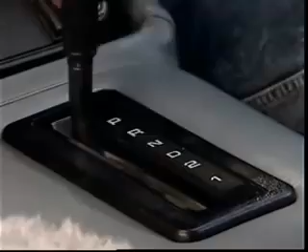Selector position 2 also permits automatic changes, but from first to second and from second to first only, depending on road speed and throttle opening. Third gear will not engage in this position.

With the vehicle cruising in third, selecting 2 will cause an immediate downshift to second. Selecting 1 in similar conditions causes an immediate downshift to second, and then, when road speed drops sufficiently, to first. Full engine braking is available in both second and first gears. This also applies when the vehicle is in reverse.

The planetary gear set is a Ravigneaux type with primary and secondary sun gears, primary and secondary planet pinions, and one ring gear. The ring gear is attached to the output shaft.

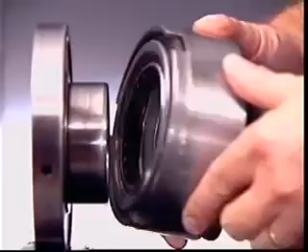The planet carrier is mounted in the transmission case on a one-way clutch. Both sets of pinions are in the planet carrier. They mesh in pairs. The longer outer secondary pinions mesh with the ring gear at their outer edge. At their inner edge, they mesh with the secondary sun gear. The smaller primary pinions mesh with the smaller primary sun gear.

The planet pinions transmit the drive from the sun gears to the ring gear. In all forward ratios, drive is transmitted through the primary sun gear. In reverse, it is transmitted through the secondary sun gear.

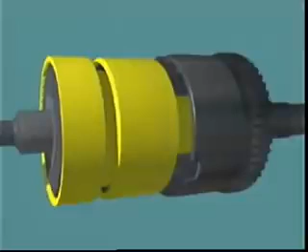Control of the planetary gear set comes from the operation of 2 multi-plate clutches, the one-way clutch, and 2 brake bands. The outer plates of the front clutch are splined to the input shaft from the converter turbine. The inner plates are splined to the primary sun gear shaft.

The inner plates of the rear clutch are splined to the front clutch drum. The outer plates connect to the secondary sun gear.

The front band wraps around the outside of the rear clutch drum. The rear band is on the outside of the planet carrier to hold the planet carrier stationary when it is applied.

When the rear band is in the release position, the one-way clutch lets the planet carrier rotate forward, but not in a reverse direction.

These are the components and control elements engaged in each gear range: the front clutch, the rear clutch, the front band, the rear band, and the one-way clutch. The front clutch combines with other elements to provide the required ratios for all forward gears.

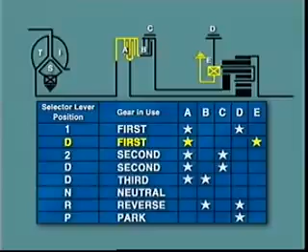When D is selected, the front clutch is engaged. The one-way clutch acts as the reaction member, holding the planet carrier stationary and stopping it rotating in the opposite direction to the input shaft.

Power flow is from the input shaft through the applied front clutch to the primary sun gear, which turns clockwise. Since the primary sun gear is meshed with the primary pinions, the pinions rotate anti-clockwise.

This turns the secondary pinions clockwise on their pins on the locked planet carrier. The secondary pinions turn the ring gear and the output shaft in a clockwise direction at a reduced ratio and with increased torque.

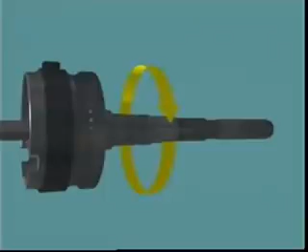The gear reduction in first gear is 2.39 to 1. The secondary sun gear rotates freely in the opposite direction to the primary sun gear.

On overrun, when torque is applied from the road wheels, the one-way clutch unlocks and allows the planet carrier to rotate. The transmission free-wheels and no engine braking is provided.

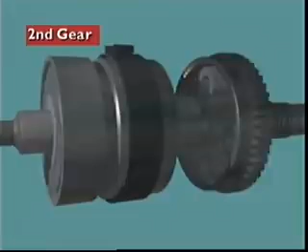In selector position D, and also in position 2, the front clutch and the front band are applied to obtain second gear. When the transmission changes from first to second, the front clutch remains engaged and the front band is applied to lock the secondary sun gear to the case.

The secondary sun gear now becomes the reaction member. Power flow is from the input shaft through the applied front clutch to the primary sun gear and to the primary pinions.

The anti-clockwise rotation of the primary pinions turns the secondary pinions clockwise. Since they mesh with the secondary sun gear and the ring gear, they walk around the stationary sun gear and rotate the ring gear in a clockwise direction.

In both drive and overrun conditions, torque reaction is taken by the applied front band, which holds in either direction. The gear reduction in second gear is 1.45 to 1.

In selector position D, the front and rear clutches are applied to obtain third gear. When the transmission changes from second to third, the front clutch remains engaged. The front band is disengaged and the rear clutch is applied. Since both clutches are now applied, the input shaft is locked to the primary sun gear through the front clutch and to the secondary sun gear through the rear clutch. With both sun gears locked together and to the input shaft, there is no relative motion between the gears. The whole gear set rotates as one unit to give a direct drive with a ratio of 1 to 1.

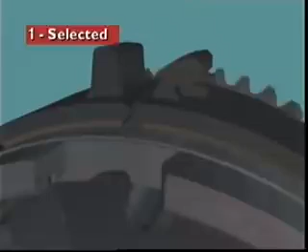In selector position 1, the front clutch and the rear band are applied. Application of the rear band locks the planet carrier to the case. Power flow through the gear set in the drive condition is the same as in selector position D, first gear. Drive is transmitted through the front clutch to the primary sun gear and through the short and long pinions to the ring gear at the ratio of 2.39 to 1. However, on overrun, the locked planet carrier acts as a reaction member, so full engine braking is provided.

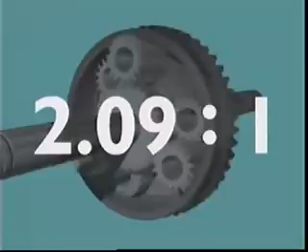In reverse, the rear clutch and the rear band are applied. The rear clutch locks the input shaft to the secondary sun gear. The rear band locks the planet carrier to the case to provide the reaction member. The input shaft turns the secondary sun gear clockwise. The secondary pinions turn anti-clockwise on their pins on the locked planet carrier. The ring gear and output shaft turn in the reverse direction with a ratio of 2.09 to 1. Full engine braking is provided on overrun.

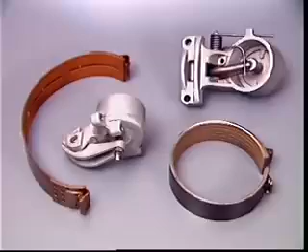Servos in automatic transmissions convert hydraulic pressure acting on a piston into a mechanical force. In this transmission, a front and a rear brake band are used. A servo is required for each.

The rear servo is a pressure apply spring release type. Its piston has a central stem which locates in one end of the rocker arm to transfer the apply force to the band. A lever-type spiral spring returns the servo and band to the off position when the fluid is dumped. The rear band holds the planet carrier stationary when it is engaged. It is applied in drive ranges with low ratios.

The high apply force required is provided by a combination of the large diameter piston and the leverage provided by the rocker arm. Fluid at line pressure is converted to an apply force by the piston, and this acts on the longer end of the rocker arm. The apply force is multiplied to about 5 times its value, then applied to the free end of the band. The band contracts and wraps itself firmly around the planet carrier drum to lock the planet carrier to the casing.

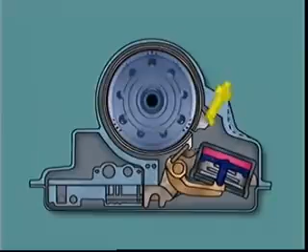An adjusting screw threaded in the casing provides the anchorage point, so the band can be easily adjusted when necessary to compensate for wear.

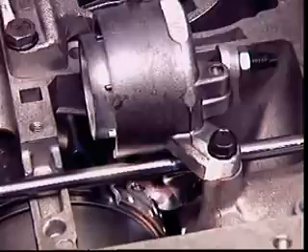The front servo is a pressure apply, pressure release type with unequal piston areas. It is engaged with the front clutch to provide second gear and acts on a lined spring steel band to lock the secondary sun gear to the casing.

The apply force from the piston is transferred through its central stem and multiplied by the rocker arm with its leverage ratio approximately 3:1. This applies the band firmly when second gear is engaged. The apply fluid acts on the smaller piston area surrounding the hollow portion, which accommodates the return spring.

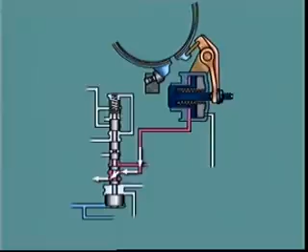If road speed is reduced, the 1-2 shift valve will move to the first gear position. This apply fluid will be exhausted at the 1-2 shift valve, letting the spring return the band to the off position.

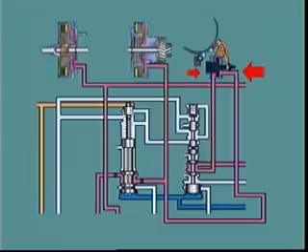If road speed increases, the transmission will eventually upshift to third gear. This requires the rear clutch to engage, together with the already engaged front clutch. The front band must be released, but the apply fluid is not exhausted to provide this change. The apply fluid is retained. Then, when the 2-3 shift valve moves to supply fluid to the rear clutch, the same fluid is supplied to the release side of the front servo. Equal line pressures act on each side of the front servo piston, so the larger area on the release side generates greater force. This moves the piston to the released position.

If the accelerator is depressed for kickdown, or road speed drops off, retaining the apply fluid can provide a snap band application to re-engage second gear.

Clutches in automatic transmissions control gear train members. This transmission has 3 clutches. A one-way or overrunning clutch is between the planet carrier and the center support. A multi-plate clutch is inside the drum attached to the input shaft, the front clutch. A multi-plate clutch is inside the drum attached to the secondary sun gear, the rear clutch.

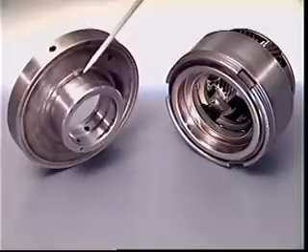The one-way clutch is a sprag type. It locks the planet carrier to the center support whenever the carrier tends to turn in the opposite direction to the transmission input shaft. The inner race of the clutch is provided by an extension on the center support. The outer race is formed in the planet carrier.

The equally spaced sprags are held together by a spring-loaded cage. It maintains them in the correct position and attitude. Correct fitting is essential, otherwise the planet carrier will freewheel when it should be locked up, and no drive will be transmitted in D-range first gear.

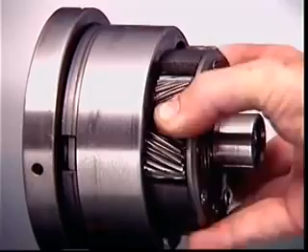With the sprags in place, the cage moves them so that they share the load equally when the planet carrier is locked. Turning the planet carrier in the opposite direction to the input shaft pivots the sprags towards the larger radius and wedges them between the 2 races.

The front clutch is a multi-plate type, engaged in all forward ratios. The clutch operating piston moves in a short cylinder in the clutch drum. A diaphragm-type spring contacts a fulcrum ring on the piston at its inner circumference. Its outer edge rests against a step in the drum.

A pressure plate is installed first in the clutch pack so that its fulcrum ring also contacts the diaphragm. When fluid at line pressure is admitted to the clutch cylinder, the piston apply force is multiplied by the leverage provided by the diaphragm. This exerts a greater apply force on the clutch pack than the piston alone could provide, and ensures the clutch is firmly engaged. The spring returns the piston to the off position when the fluid is dumped.

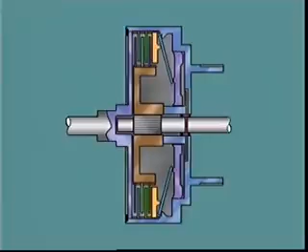Two sets of plates make up the clutch pack: the driving plates and driven plates. The outer driving plates are flat. External splines locate in mating splines in the clutch drum.

The inner driven plates have friction material bonded to them. Their splines mate with splines on the outside of a central hub, which is itself splined to the primary sun gear. The friction material can be treated fibre or reinforced paper. It may have a grooved surface to assist in wiping oil from between the plates when the clutch engages.

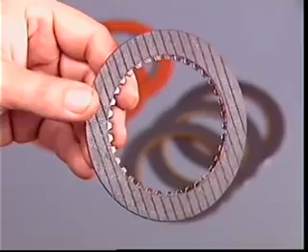The plates are loaded into the clutch drum against the pressure plate and are placed alternately to make up the pack. The central hub is installed to engage the inner plates and the thrust washer placed in position. The large face of the input shaft acts as the final plate in the pack. The splines at its outer edge transmit the input torque to the clutch drum and the driving plates.

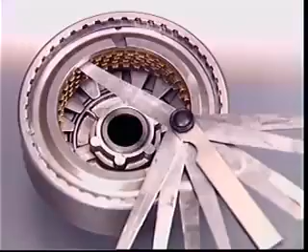The input shaft is retained in the drum by a large diameter snap ring. The number of plates installed determines the torque capacity of the clutch. Installing more plates increases torque capacity, but the clutch must always maintain its set clearance so the plates can separate from one another while in the released position.

A centrifugal relief valve in the clutch piston releases fluid trapped in the cylinder when the clutch is released. This prevents partial application of the clutch due to centrifugal force acting on the fluid at high speed.

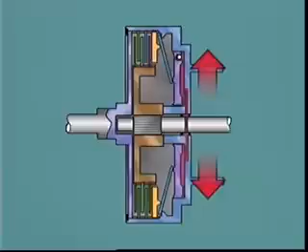The rear clutch is similar in construction to the front clutch, but with a larger diameter piston and a coil-type return spring. This spring is compressed against the face of the clutch piston when fitted. The outer plates in this clutch are the driven plates and are splined to engage with the splines in the clutch drum as before.

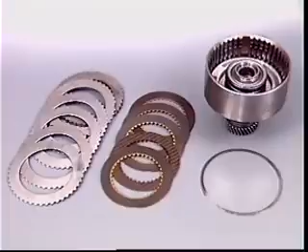These plates may have a flat surface or a slightly dished or coned surface. The dished plates provide a cushioning effect, which assists with smooth engagement when the clutch is applied. The plates may be fitted as a pack, with the dishing in either direction, but all of the dishing must face the same way, or clearance may be compromised.

The inner plates are splined to mate with splines on an extension on the front clutch drum. They transmit the drive from the input shaft to the outer plates when the clutch is engaged. The clutch plates are assembled in the pack alternately, with the steel plate placed first against the clutch piston. The pressure plate is assembled last, and the pack is retained in the drum by a snap ring.

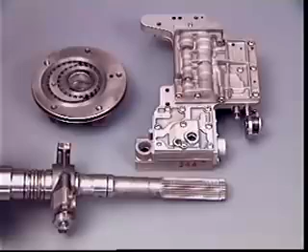The hydraulic system has a crescent-type gear pump, a centrifugally operated hydraulic governor, and a control valve body assembly to regulate the pressure and direct fluid to the appropriate components.

The pump is driven by tangs on the converter spout and operates whenever the engine is running. It supplies all the hydraulic requirements of the transmission during operation.

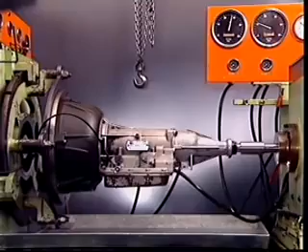The governor is driven by the transmission output shaft and provides a hydraulic pressure that varies with vehicle speed. This variable pressure is used by the valve body as one of the inputs to control upshifts and downshifts.

The valve body has all the valves needed to control the transmission at all stages of operation. They are mostly spool-type valves, but disc and ball check valves are also used.

Cylindrical spool valves have a number of distinguishing features. The lands are the raised portions of the valve, while the reduced diameter between each pair of lands is referred to as a valley. The face of each land is square and sharp to the land diameter.

Some valves have a stem or extension on one end to locate a regulating or return spring, or to limit valve travel.

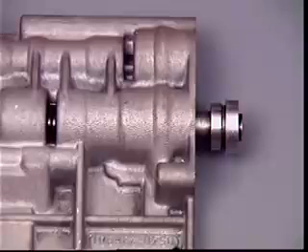Sharp corners on lands keep out dirt particles and give the valve a self-cleaning action as it moves back and forth in the bore.

There is only small clearance between lands and the bore for each valve, so they must be handled with care.

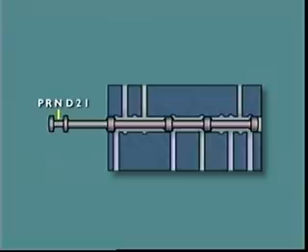Spool valves can be positioned manually, or by springs, or by pressure, and in many applications have lands of different diameters. In this case, the different diameters result in a larger face area on land 1 than on land 2. This is known as a differential area.

When fluid under pressure enters port B, this differential area creates a differential force. This moves the valve to the left, since the force acting on land 1 is greater than the force on land 2.

Alternatively, the valve could be moved by admitting fluid at port C. In both cases, the valve movement allows previously blocked fluid at D to flow between lands 3 and 4. It exhausts at E or passes to some other part of the system.

If fluid pressure is removed from C, the valve remains stationary. Even if fluid is admitted at port A, no movement can occur, as the areas on lands 2 and 3 are equal and both generate an equal force.

The valve can only be moved back to its original position by introducing spring pressure or fluid pressure on the left-hand side of land 1.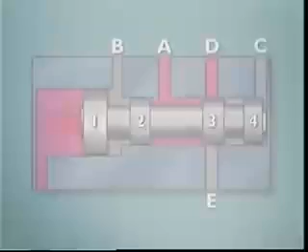The valves can be divided into two groups: pressure regulating valves, and those that direct flow and pressure, or flow control valves.

Spool-type valves are suitable for pressure regulation in automatic transmissions, as variable pressures are needed.

In this regulating valve, the valve spring is compressed when pump or supply pressure is high enough. The larger land then uncovers an exhaust port to maintain a regulated output pressure.

Similarly, with this regulating valve in a fluid circuit, the valve is forced downwards against its spring until it uncovers a port to another part of the circuit.

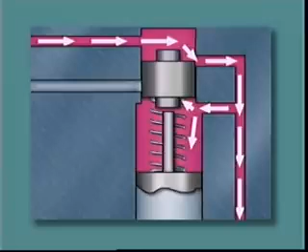Since the port is not fully uncovered, flow is restricted, which causes a pressure drop across it. Fluid pressure in this part of the circuit falls below that of the fluid being supplied. Once the port is fully uncovered, pressures on both sides of the valve become equal.

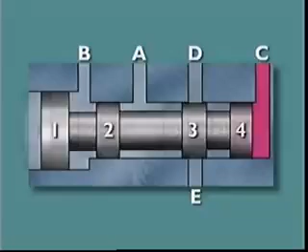Control valves are simple gate-type valves, which open or close off a circuit without altering pressure. The manual valve connected to the gear lever is a control valve, which directs fluid to components when a drive range is selected.

Control valves can also react to changes in pressure. This shift valve is held at the end of its bore by spring tension. It blocks the fluid under pressure at port A. The larger differential area at port C is subject to governor pressure.

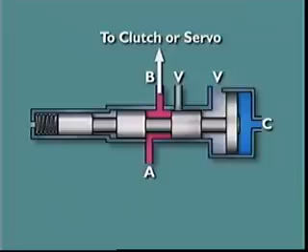As road speed rises, the rising pressure forces the valve to the left, and fluid flows across from port A to port B. This can be directed to operate the next clutch or servo and change the transmission to a higher ratio. As road speed falls and governor pressure diminishes, the spring moves the valve back to cut off the fluid supply, and the transmission downshifts.

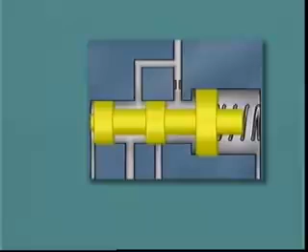Orifices are often used in conjunction with spool valves to restrict fluid flow for timing purposes or to prevent valve fluctuations. The orifice is designed to prevent sudden or undue movement of a valve.

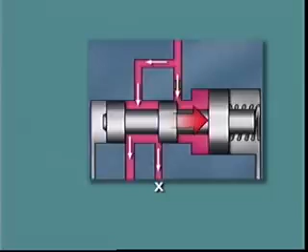In this basic primary regulator valve, the orifice is in the circuit leading to the large differential spool area. The buildup of line pressure from the pump acts via the orifice to move the valve against the spring force. This uncovers the exhaust port to release excess fluid and allows fluid at a controlled line pressure to pass to the rest of the hydraulic system.

The pressure is determined by the tension of the spring. However, pressure fluctuations are reduced because the orifice prevents the valve from reacting quickly and thus stabilizes the regulated pressure.

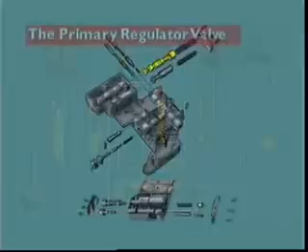This valve controls fluid pump output to maintain the required line pressure in the system. Line pressure is the highest pressure in the transmission, and all other pressures are derived from it.

This valve reduces line pressure to a low value for use in the torque converter and in the cooler and lubrication circuits.

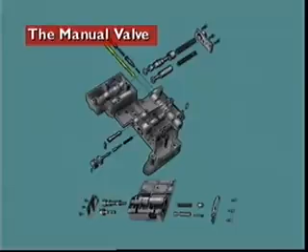This valve is positioned manually by the driver operating the selector lever. It's a control valve which directs line pressure in and out of circuits when each range is selected.

This valve shares a common bore with the downshift or kickdown valve. Both are influenced by the downshift cam, connected by a Bowden cable to the accelerator linkage.

The throttle valve re-regulates line pressure to a value which is proportional to throttle opening. The resultant throttle valve, or TV pressure, varies from zero at closed throttle to line pressure at full throttle.

This pressure is supplied to the spring end of the shift valves to delay upshifts relative to throttle opening. The wider the throttle opening, the greater the TV pressure and the higher the road speed will be before an upshift will occur.

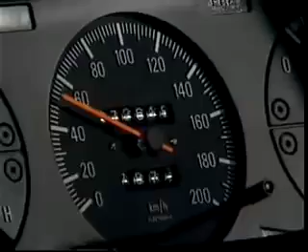TV pressure is also directed to the spring end of the primary regulating valve. As the accelerator is depressed, it progressively raises line pressure.

This ensures the engaged servos or clutches are securely applied when high torque is being transmitted and allows the pump to operate at lower pressures at other times. This reduces pumping losses and lowers fuel consumption.

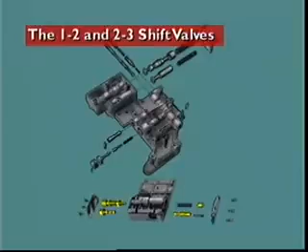The 1-2 and 2-3 shift valves are control valves, which are supplied with line pressure from the manual valve. They either block fluid or allow it to flow at prevailing line pressure to a clutch or band.

Their operation is determined by a spring plus TV pressure at one end. This acts in opposition to governor pressure at the other end.

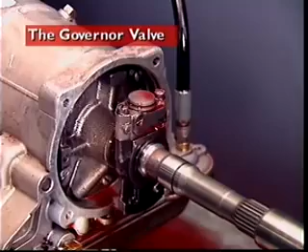This valve is mounted on the transmission output shaft and rotates with it. It re-regulates line pressure supplied from the manual valve in relation to vehicle speed.

When vehicle speed is low, governor pressure is low. When vehicle speed is high, governor pressure is high. Governor pressure is directed to the end of the shift valve to oppose TV and spring pressure. This produces upshifts relative to vehicle speed.

This valve is included in the throttle valve combination. When the accelerator is depressed fully, the downshift valve supplies line pressure onto the spring end of the shift valve.

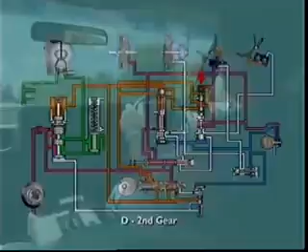If road speed is below a certain value, this forces the shift valve to move and initiate a downshift to a lower gear.

This valve is in the circuit to the release side of the front band servo. It is a timing device. When a 2-3 upshift is made at higher road speeds, it correlates front band release and rear clutch application.

Conversely, it correlates rear clutch release and front band reapplication when a 3-2 downshift is made under similar conditions.

This valve makes line pressure and throttle pressure sensitive to road speed. At higher speeds, it cuts back these pressures to allow smooth upshifts.

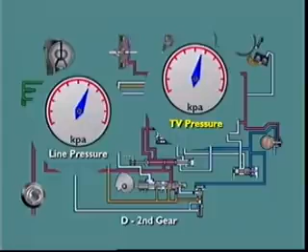It also moderates line pressure increases produced by wide throttle openings during stall or upshift conditions. High throttle pressures produced at these times raise line pressure very high.

This is because the throttle pressure is applied to the spring end of the primary regulating valve. Modulator pressure is applied to the opposite end of the regulating valve to counteract this and moderate its influence.

This is a summary of the basic action of the valves in the hydraulic system. The primary regulating valve maintains line pressure in the system. Line pressure is directed to the manual valve and to the throttle valve at all times.

The secondary regulating valve determines the pressure in the converter and in the lubricating circuits. The manual valve directs line pressure to the shift valves and to the governor valve. The shift valves direct line pressure to the band and clutch servos.

Governor pressure is directed to one end of the shift valves, while throttle valve pressure is directed to the other end. Throttle pressure is also directed to the spring end of the primary regulating valve to boost line pressure as required.

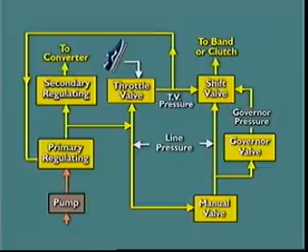The valves act together in the system, but their operation can be considered separately. The primary regulating valve has a number of lands, including one larger land which provides a differential area. A central stem locates the regulating spring.

Fluid from the pump can act on the valve through a 1 mm diameter orifice in the circuit. With the valve at rest, the two central lands block the flow of fluid across their valleys. The spring end of the valve is subject to throttle pressure through a circuit connection from the throttle valve. The lower end is subject to modulator pressure acting on the lower face of the bottom land. A vent between the two uppermost lands prevents hydraulic lockups due to fluid seeping into the valley between them.

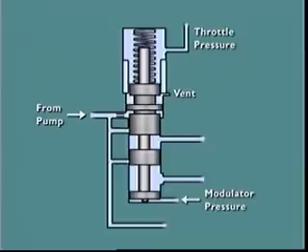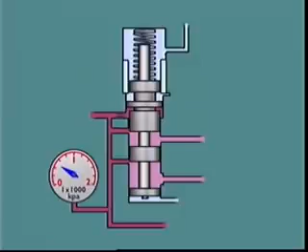In operation, fluid from the pump enters the valve through the orifice and acts against the differential area. As pressure rises, the valve moves upwards against its spring. Excess fluid can then pass across the two large valleys to the ports in line with them. The result is an initial regulation of line pressure at idling speed. This line pressure is directed to the manual valve and the throttle valve at all times.

When D is selected, line pressure is also directed to the front clutch, to the 1-2 shift valve, and to the governor. Excess fluid passing across the valleys is directed to the secondary regulating valve and the converter.

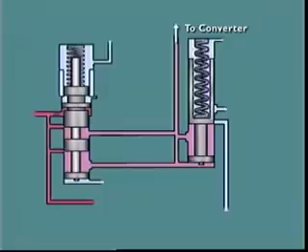Fluid from the lower port of the primary regulator valve acts on the end face of the secondary regulating valve. This raises it against its spring. Valve movement uncovers a port to the lubrication circuit for the rear end of the gear train, and then an exhaust port leading back to the pump inlet. The exhaust bleed-off stabilizes fluid pressure in the lubrication and converter circuits within acceptable limits, from 100 to 200 kilopascals.

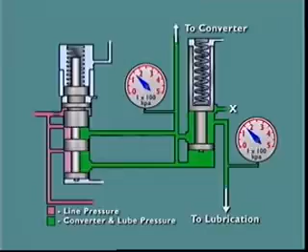Line pressure needs to vary in step with accelerator position and vehicle speed. That requires extra control over the primary regulating valve. High line pressure will hold a band or apply a clutch securely to prevent slippage when the accelerator is depressed and high torque is transmitted. Once the vehicle is moving and the transmission is upshifting, less torque is transmitted, so lower line pressure is adequate.

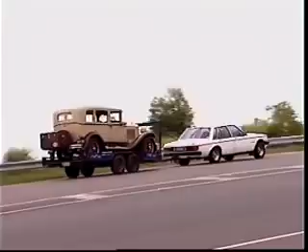Applying throttle pressure to the spring end of the primary regulating valve lifts line pressure. Applying modulator pressure to the opposite end reduces it.

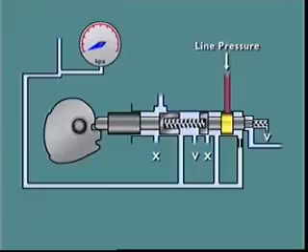Line pressure is supplied to the throttle valve at all times, and throttle pressure is derived from it. At closed throttle, the throttle valve is at rest and line pressure is blocked off by a land. Throttle pressure is zero. Depressing the accelerator transfers movement through the kickdown valve and spring. This opens the throttle valve and the land uncovers the line pressure port. Fluid at line pressure is now metered into the throttle valve circuits and a TV pressure is quickly established.

It extends through the orifice to the valve reaction area. This tends to close the valve against the spring force, minimizing pressure fluctuations. A balance is established to produce a TV pressure relative to the accelerator position. TV pressure can vary from 0 to around 1200 kilopascals.

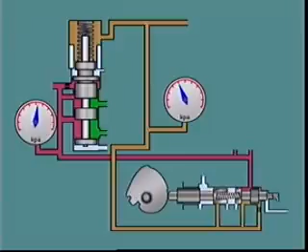TV pressure is directed back through the circuits to the spring end of the primary regulator valve. It helps the spring oppose the force of fluid acting on the valve's differential area via the orifice. TV pressure holds the primary regulator valve down to increase line pressure according to throttle opening. This ensures clutch and band apply forces are maintained in step with throttle position.

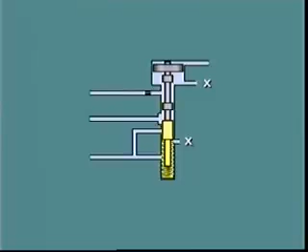Once a vehicle is moving, the primary regulator valve needs to reduce line pressure to assist smooth gear shifting and fuel economy. Modulator valve pressure is directed to the end of the valve opposite to the regulating spring. The modulator valve assembly is in two sections: a modulator valve and a modulator plug and spring.

The modulator valve operates by throttle pressure, but is also subject to governor pressure, so its output responds to accelerator position and vehicle speed. Throttle pressure directed to the modulator valve moves the valve up and forces the plug down against the compression of the spring.

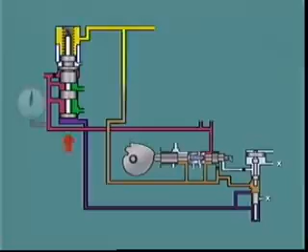Separating the valve from the plug re-regulates the throttle pressure to modulator pressure. It is then directed to the end of the primary regulator valve opposite the spring. If the accelerator is fully depressed, high modulator pressure forces the primary regulator valve upward to oppose throttle pressure and spring pressure. This prevents excessive line pressure under stall conditions.

Rising vehicle speed develops governor pressure, which is directed onto the large land area at the end of the modulator valve. When governor pressure overcomes throttle pressure, it forces the modulator valve down. That forces the modulator plug to bottom out. The modulator plug can then no longer reduce the incoming throttle pressure.

Undiminished throttle pressure will now exist in the modulator circuit. The regulator valve is forced up, reducing line pressure for a smooth upshift. This reduction in line pressure is called the cutback point.

Moving the modulator valve down allows throttle pressure to pass between the modulator valve lands. This passes into a circuit, returning to the smallest reaction area at the end of the throttle valve. This pressure acting through the orifice in the circuit helps move the throttle valve to the left against its regulating spring. This reduces the initial throttle valve pressure established in the throttle pressure circuit, and in turn further reduces line pressure.

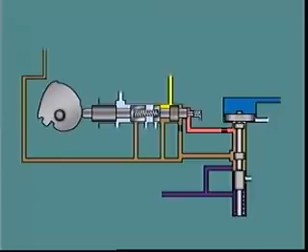When D range is selected, the manual valve directs fluid at line pressure to the front clutch, which remains applied in all forward gears. Fluid is also directed to the governor and the 1-2 shift valve, where it is blocked at a differential area. A separate circuit from the manual valve directs line pressure to a differential area of the 2-3 shift valve.

This is held in the downshifted, or 2, position by a combination of the differential force and the spring force. The 1-2 shift valve is in two sections. The shift valve itself is the lower section, held in its downmost position by a combination of the differential force and the upper section plunger and spring.

As soon as the accelerator is depressed, throttle pressure helps hold the valves in the downshifted position so that their movement is influenced by accelerator position.

When the vehicle is moving, the governor re-regulates line pressure supplied to it and directs this pressure to the large land areas at the bottom end of the shift valves, to the servo orifice control valve, and to the modulator valve.

The governor is in two sections: the valve and its spring, and a central stem and bob weight retained by a C-clip. It operates by centrifugal force in two stages.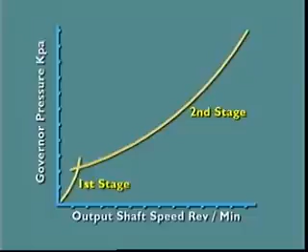In the first stage, at lower road speeds, the bob weight and valve act as one unit. Rotation of the governor throws out the bob weight, causing the valve to uncover the line pressure supply port, and fluid under pressure flows through the port to exert thrust on the face of the valve. This thrust increases until it can close the valve against the opposition of the centrifugal force. The valve action produces a pressure at the outlet proportional to the force acting on the bob weight.

As speed increases, pressure needed to close the valve increases also. For any given value of line pressure, the result is a governor pressure which increases with speed. The second stage starts when the bob weight stop contacts the body. Balance between opening and closing the valve is now achieved by the centrifugal effect on the valve and the fluid acting on its pressure face.

Governor pressure acts on the end of the 1-2 shift valve. As road speed increases, it becomes high enough to overcome the opposing spring and throttle pressure. The shift valve assembly moves upward and lets line pressure pass into the circuit to the apply side of the front band servo. The transmission is now in second gear.

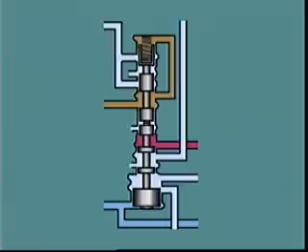Downshifts occur only at vehicle speeds below those at which upshifts occur. This shift spread prevents a transmission hunting up and down between ratios. It is called shift speed hysteresis.

Additional force can be provided to produce a 2-1 downshift under kickdown conditions. This is provided by the kickdown portion of the kickdown throttle valve combination.

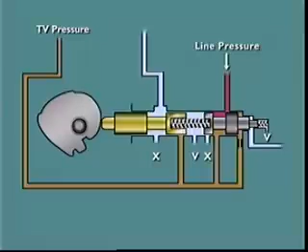When the accelerator is fully depressed, the kickdown valve closes off the exhaust from the kickdown circuit and forces the throttle valve to the end of its bore. The throttle valve can then no longer regulate the incoming line pressure.

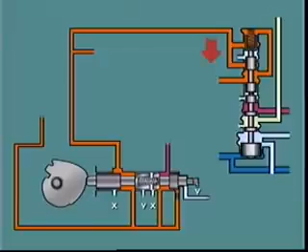Throttle pressure now becomes equal to line pressure and passes into the kickdown circuit, leading to the kickdown port at the 1-2 shift valve. Fluid passes across the valley area and onto the spring end of the plunger. The force this provides overcomes governor pressure and returns the shift valve to the first gear position. This releases the front band by opening its apply circuit and exhausting the apply fluid back to the pan.

As road speed rises, governor pressure increases. It acts on the large differential area on the bottom land, so governor pressure will become high enough to force the valve upward and overcome kickdown pressure. This keeps engine RPM within safe limits in the automatic range.

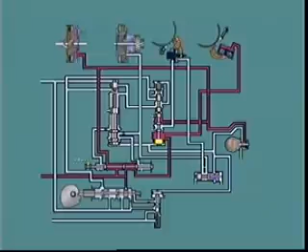When 1 is selected, the manual valve supplies line pressure onto the differential area and through a separate circuit to apply the rear band. The application of the rear band provides engine braking on overrun. This circuit passes through the bottom valley area of the valve and acts on the large bottom land to hydraulically lock the shift valve down.

Governor pressure cannot force an upshift, so the transmission will remain in first gear until the lever is moved to 2 or to D when an upshift can occur. Once the transmission upshifts into second gear, the rear band circuit can exhaust at the shift valve. The rear band is inoperative in first gear when D is selected, as its circuit is open to exhaust at the manual valve.

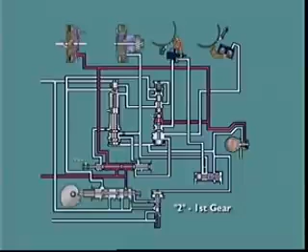Choosing position 2 directs line pressure to the front clutch, the governor and the 1-2 shift valve. The vehicle will move off in first gear and change up to second gear as soon as governor pressure is high enough to move the shift valve up and let fluid pass to the apply side of the front servo. No further upshifts can take place since no line pressure is supplied to the 2-3 shift valve. The valve moves upward under governor pressure, but it controls no fluid flow and no changes can occur.

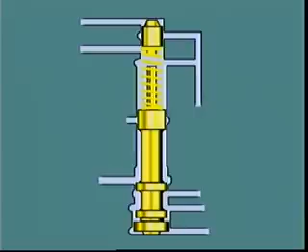The 2-3 shift valve assembly consists of the shift valve, its spring, and a throttle pressure regulating plug. In D range in second gear, line pressure from the manual valve is applied onto a differential area. This helps the spring hold the valve down against governor pressure. In this position, the rear clutch apply and front band release circuit is open to exhaust.

With the vehicle moving in second gear and a minimum throttle opening, throttle pressure applies to the top of the regulating plug. But then, throttle pressure is too low to move the regulating plug downwards. The only forces opposing governor pressure are the spring and the line pressure on the differential area land. A 2-3 upshift occurs at relatively low vehicle speed.

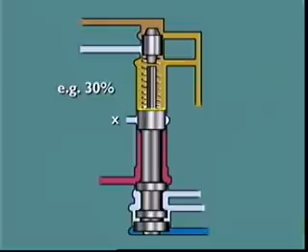With the vehicle in second gear, at higher throttle openings, higher throttle pressure moves the plug down towards the shift valve. This re-regulates the throttle pressure to a lower value so that it can act on the top land of the shift valve. This helps the spring control the shift points relative to accelerator position at lower vehicle speeds.

As soon as governor pressure is high enough to overcome the opposing forces, the valve upshifts into top gear position. Fluid at line pressure flows across to apply the rear clutch. At the same time, fluid passes through the servo orifice control valve to the release side of the front band servo. The front and rear clutch are the only components being applied, so top gear is achieved.

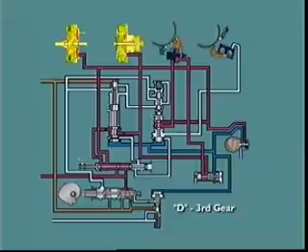The servo orifice control valve is a timing device. It prevents engine flare at wide throttle openings on a 2-3 upshift. It also stops transmission tie-up, that is, being momentarily in 2 gears during a 3-2 downshift. It's a shuttle valve, which can be held at rest by a spring to allow unrestricted fluid flow. Or it can be moved by governor pressure to insert a restricting orifice in the front band servo release circuit.

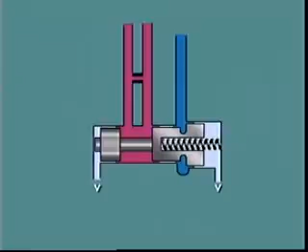At low vehicle speeds, governor pressure is not high enough to move the valve. When the 2-3 upshift occurs, fluid flows unrestricted to the release side of the front servo. This type of shift occurs at light throttle openings, so the rapid clutch and band actuation does not cause engine flare.

At wider throttle openings, vehicle speeds are higher before an upshift occurs. So governor pressure will have built up enough to move the valve, so fluid must now pass through the orifice. This slows the release at the front band and ensures the rear clutch is fully applied and able to transmit torque as the band comes off. This prevents engine flare.

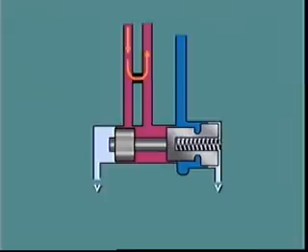On a downshift at high vehicle speeds, the orifice slows the release of fluid from the release side of the front servo and therefore the reapplication of the front band. Then the rear clutch comes off as the band is applied, preventing a lockup in the transmission.

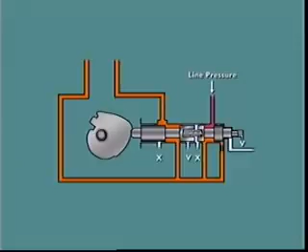When a 3-2 kickdown downshift is required, the fully depressed throttle stops the throttle valve regulating the incoming line pressure. Throttle pressure becomes equal to line pressure. Fluid at line pressure passes through the kickdown valve and acts on the top land of the 2-3 shift valve. If road speed and governor pressure are low enough, the force provided will move the valve down and effect a change to second gear. Then if road speed rises enough, governor pressure will overcome the opposing forces and move the shift valve upwards. If road speed is above a certain minimum, a downshift is denied, preventing over-revving.